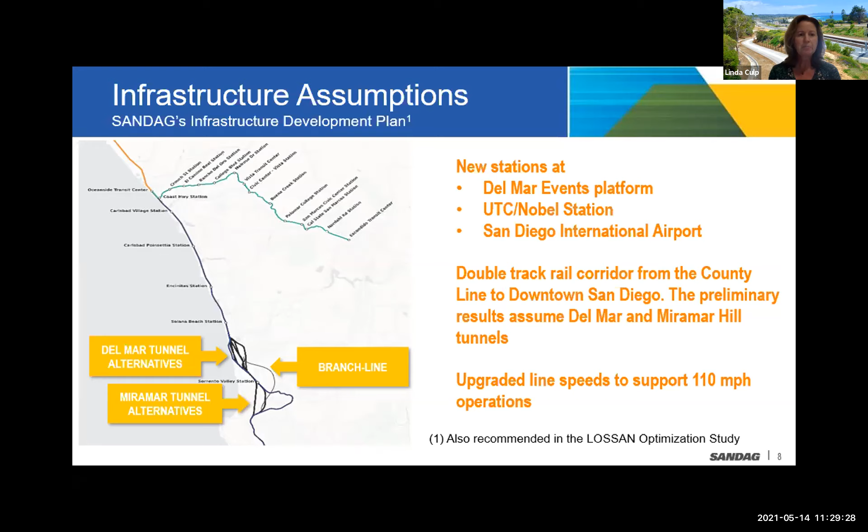Some findings on the operations side: first, we are recommending the corridor upgrade to 110 miles per hour, up from the 90 mile an hour maximum right now. We didn't find any measurable benefits with running any higher speed, say going to 125. We did document benefits with zero emission vehicles in terms of how fast they get in and out of stations. We also want to work with our freight partner, who had some concerns about running as fast, continuing to run about 60 miles an hour in a truly high speed corridor, which is why we limited ourselves to 110.

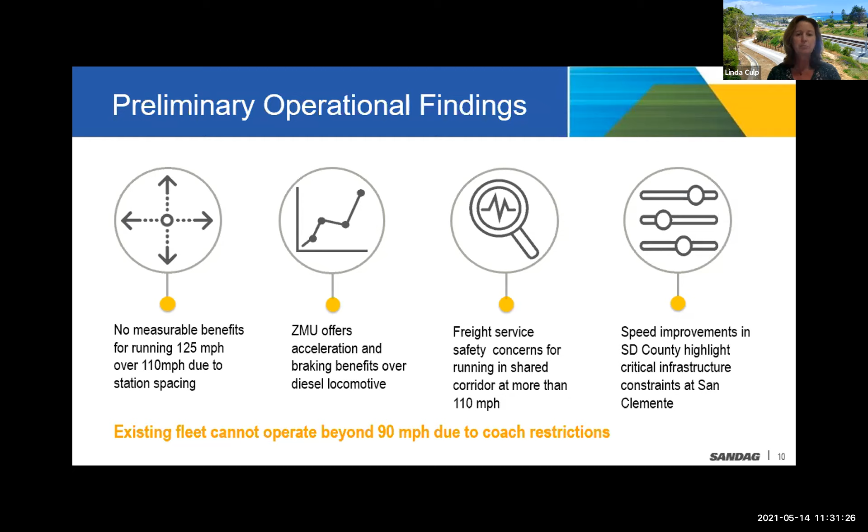Turning our attention from operations to some of these key realignment areas, the first one that comes up is our Del Mar area. To orient you on the map, on the left-hand side you can see a tip of the Del Mar Fairgrounds, I-5 at the top of the map, and the Pacific Ocean would be at the bottom.

For the last couple of years, we've been studying at a conceptual level 5 different potential tunnel alignments, and those are shown in the colors, ranging from on the west side underneath Camino Del Mar or Highway 101, underneath Crest Canyon where we'd have 3 alignments, and then one over and underneath I-5.

The stars on these maps represent a proposed portal location. So what that would mean is, going south, I leave Solana Beach, I would go into the star, which would be a portal location, and that's where the tunnel would start. Then the corresponding star is where the tunnel would come out.

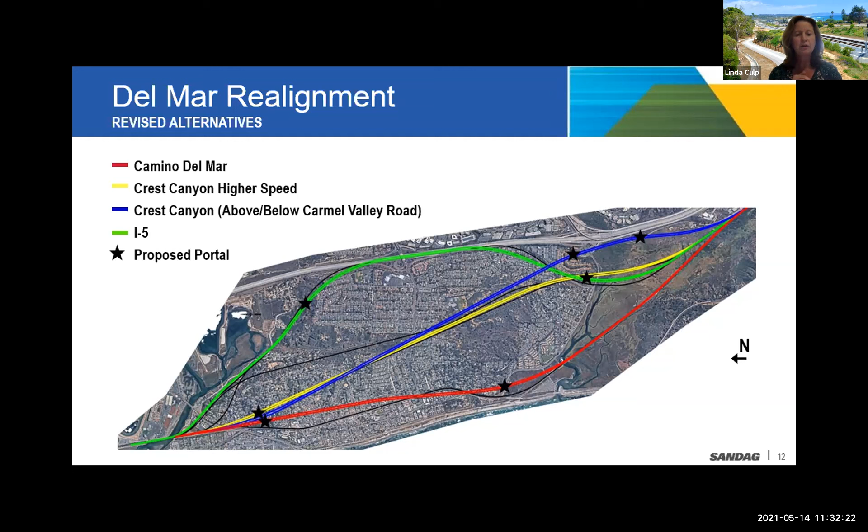Next slide. So we have some preliminary analysis, let me break down this table. First, for all 5 alignments, the first column is the maximum speed. Today, passenger trains can run 90, freight trains can run 60, not in all parts of the corridor, but they're authorized to do so in key segments. You can see that all but one of the alignment alternatives meets our 110 mile an hour threshold for passengers. The I-5 alignment would not, it's a little bit slower and curvier.

On the middle bar, the capital cost comparison, if we use the Camino Del Mar tunnel as our base, you can see how the other 4 alignments shake out, again with I-5 being the highest cost.

Over on the right-hand side, in terms of travel time, I wanted you to visualize a trip on the train from Solana Beach south to the Old Town Transit Center. First, if we're on our all-stop or coaster service, right now that trip takes 31 minutes. If we have the Del Mar Tunnel alignments, that 31-minute trip gets reduced to 28 or 29 minutes, depending on the alignment.

But if a zero emission vehicle is used, there are additional benefits. For example, that 31-minute trip could be made in something like 26 minutes. And then you see a corresponding trend with the limited stop or Amtrak service, if you will.

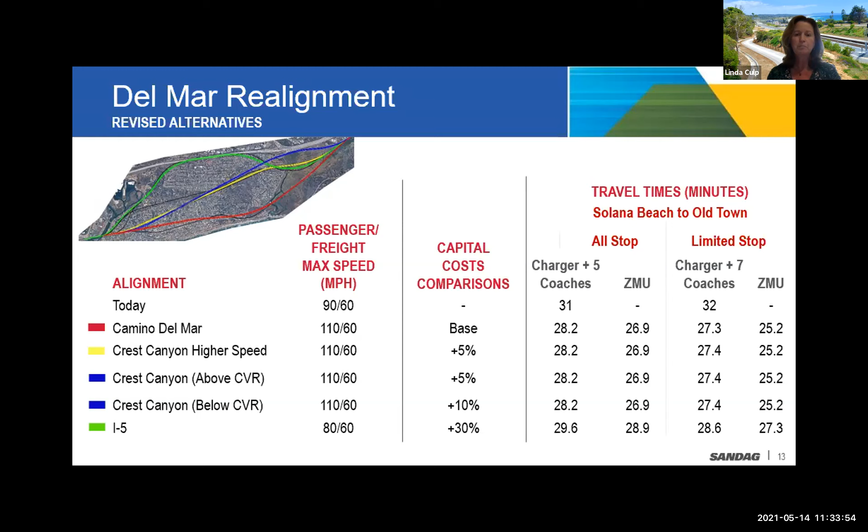Next slide. This is just a summary of those 5 alignments. You can see we talked about cost, the length of the project area versus the length of the tunnel, so not the entire 4.5 to 5 miles would be all tunnel. There would be some elevated structures, for example getting to and from the portals. Some of these could be quite deep - underneath Crest Canyon could be as deep as 480 feet below grade.

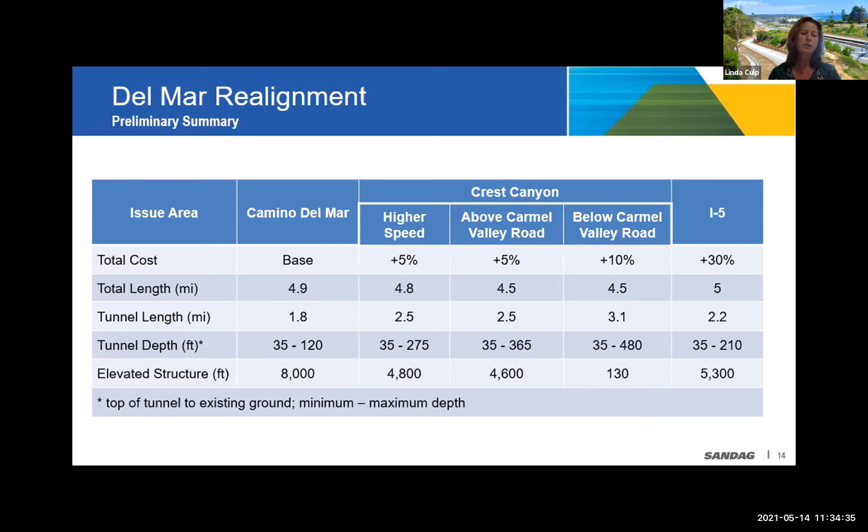The project development team did substantial work in terms of technical evaluation criteria and applying that to all these alignments. What we recommend is we reduce the number of alignments from 5 to 2, and carry forward for additional analysis and design work the Camino Del Mar tunnel and the higher speed alternative underneath Crest Canyon.

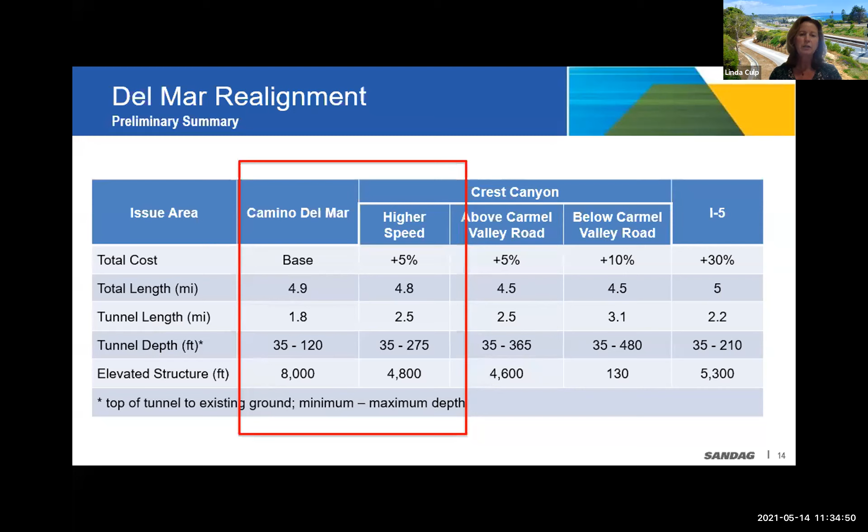Next slide, please. So turn attention a little farther south. This is in our Miramar Hill area. You can see the 5-805 interchange, kind of on the top left-hand side of the photo. We've painted on in orange our near future mid-coast light rail line for reference, and this is the University City area.

We have 2 alignment alternatives we're studying here, piggybacking on a Caltrans study they finished last year. One is the Torrey Pines alignment in blue, and one is the UTC alignment in purple. Again, you can see those same proposed portal locations in stars.

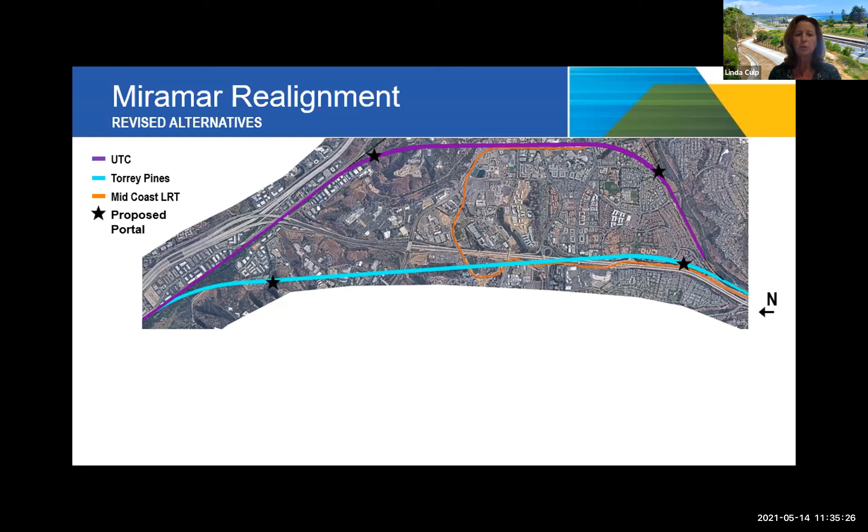If we click again, we'll put up some analysis for you. Both of these tunnel alternatives reach our 110-mile-an-hour maximum speed for passenger trains. They're both fairly similar in cost at this high level as we know it.

But just to turn your attention on the travel time analysis, where we really will see significant savings in the corridor will be through this Miramar tunnel. I note that the maximum speed for service is 90 miles an hour today, across different segments of our corridor. But this is the slowest segment of the LOSSAN corridor between LA and San Diego, and trains are going about 25 miles an hour up this hill.

So that translates into the travel time savings you see on the right-hand side. For the all-stop service, that's our coaster service - right now that same 31-minute trip from Solana Beach to Old Town could go, with the Miramar Hill Tunnel and a zero emission vehicle, to about 18 minutes.

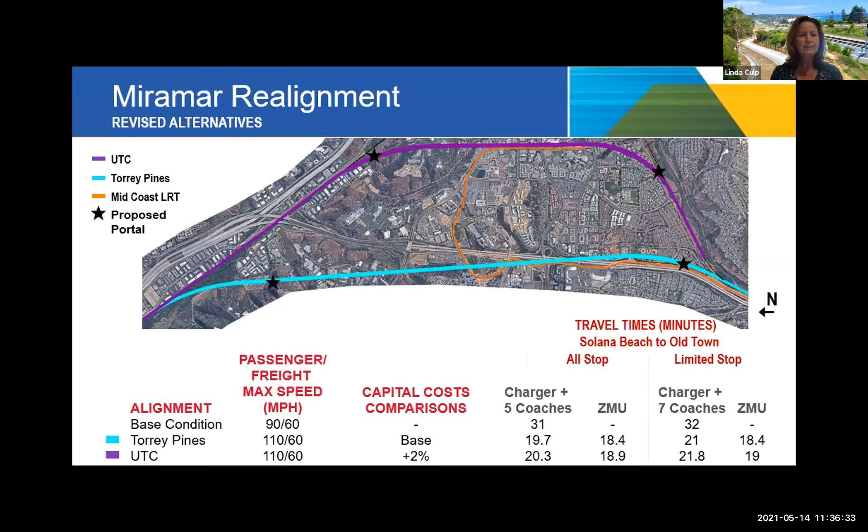So some very significant time savings here for Miramar Hill Tunnel. Just to summarize, we talked about cost and length, which are very similar, and the tunnel length is there. Torrey Pines is the deeper of the two. We're not suggesting to pick one of these at this level of analysis. We're going to carry both of these alternatives into further study.

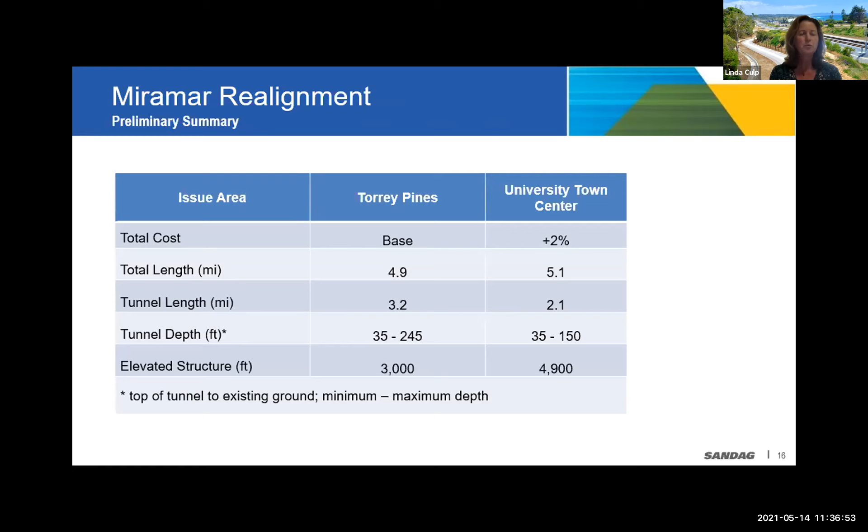The last segment, just to spend a couple of minutes on tunneling overall in general, and something very important, which is fire life safety. Just to point out a couple of things that we're looking at that's important to note.

One, we study tunnels that have similar ground conditions and similar geology, and we have some examples right here in Southern California. That middle photo, for example, is the Mission Valley East tunnel for our trolley system. We have examples in LA and other parts of the West Coast that we'll draw upon for the work we're doing.

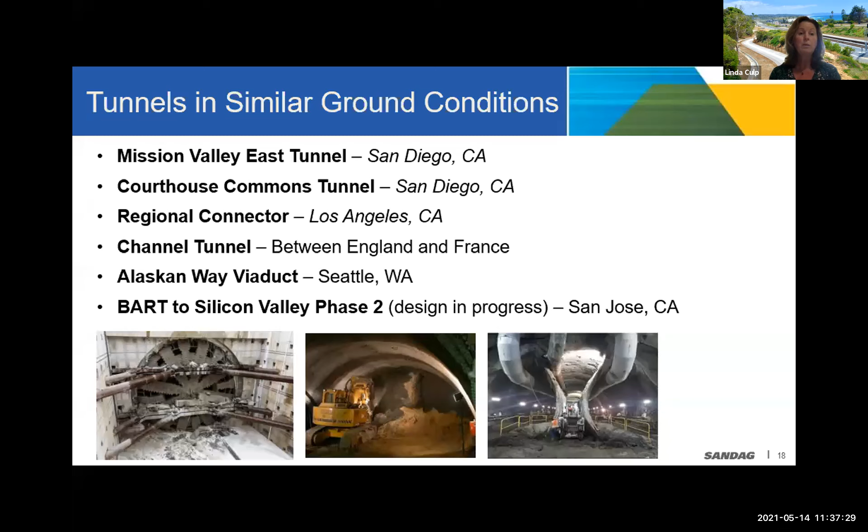As I mentioned, it's very important to think about fire life safety. We have significant guidelines and requirements that we'll be following. Some of the reasons we might need to leave a tunnel without the train could be a fire in the tunnel or the train, a power outage, a derailment, or another breakdown. These are important things to keep in mind in the design and planning phase.

And how would we get out? This photo shows you just one example. There could be cross passages—if it's two bored tunnels, cross passages could get you from the affected tunnel into the next one and get you out safely. It could be an exit to the surface, walkways like you see on the right-hand side of this photo, and certainly emergency signage and that kind of thing to make this as easy and efficient as possible. These are things we're very aware of as we're designing these two tunnels.

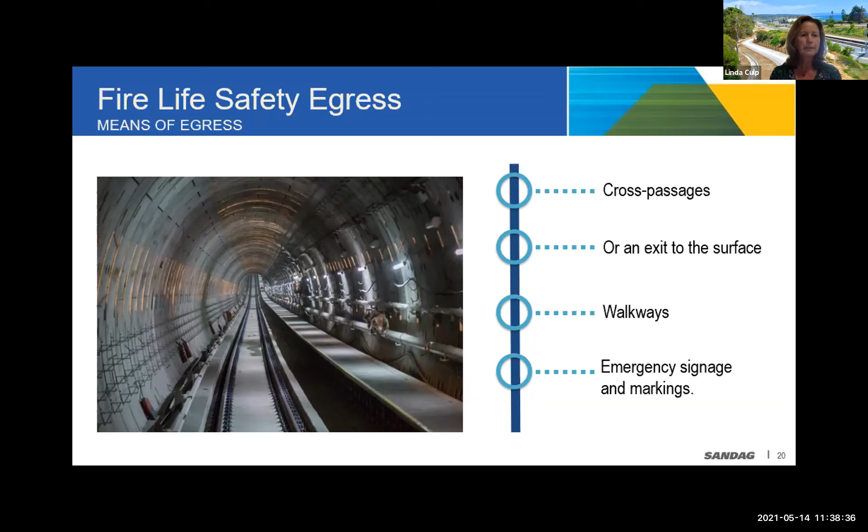And then just to end up the presentation, to let you know what we've been doing and what we will be doing: we have some building block baseline documents that will be done this summer. Those are guiding the tunnel alternatives and the other higher speed evaluation. We'll be wrapping up the Del Mar Tunnel alternatives analysis, with about 10% out of 100% engineering done—very preliminary, but an important step.

Same with Miramar Hill alignments this fall. Then we'll turn our attention to the rest of the corridor and look at where we could have higher speed improvements in those areas, finishing up next spring with a phasing and implementation plan. Future phases of development of any of this work are pending funding, but we are actively looking right now for additional funding at the state and federal level. So with that, I will stop. Thank you for the time, and happy to take any questions and comments you might have.